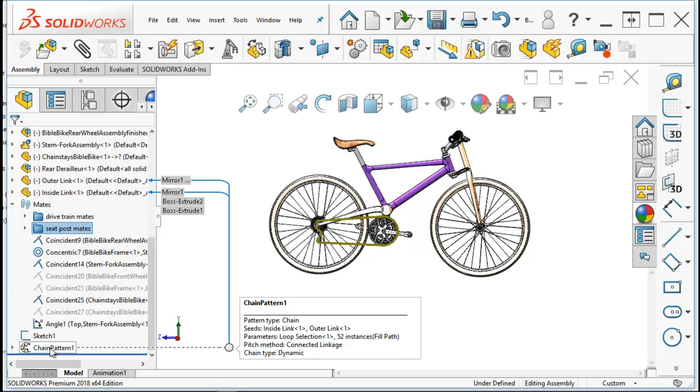Another thing that you can do that you might not even think of is to use patterns in some cases, rather than making a lot of parts and mating them into your assembly. So for the chain in this assembly, we only really put in a single link, then use the chain pattern to create the rest of the links. Now this does create the rest of the parts. You're not going to avoid that, obviously, but what it does avoid is making a lot of mates.

And solving a lot of mates is one of the things that slows down assemblies, especially as they get larger. If you are able to take this pattern and put it into one of the sub-assemblies, that would be another thing that you could do to help improve the performance of your top-level assembly.

Well, let's take a look at a couple other things. When you open up one of these parts, you've got a lot of extra information in here, but you also have mates that are specifically related to that particular part. So that's one of the ways that you can browse to information that you need very quickly.

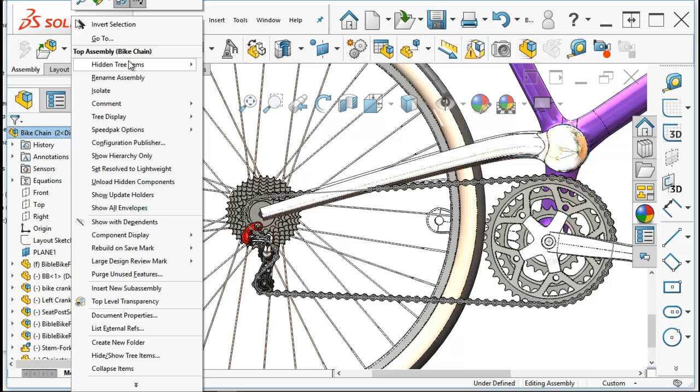Let's go to the top level, right click on the assembly name here, and take a look at some things. Generally in your assembly, if you don't need all of these things, like you don't need the configuration names, you don't need the display state, and maybe you don't even need to see the features for each particular part. What you want to see is the mates and dependencies while you're in the assembly.

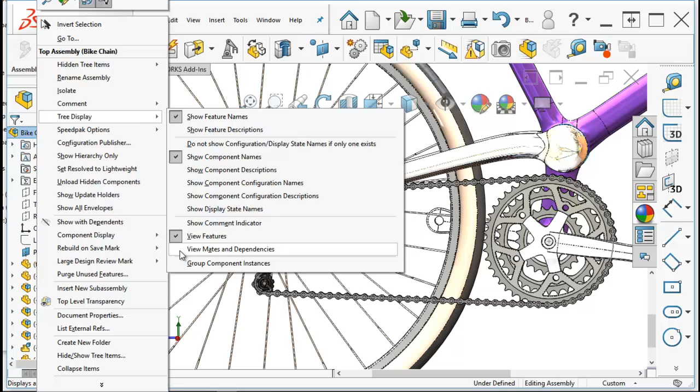So if I make that switch here and then come down and look at the part, all I'm seeing here is the mates. I can also see the features if I want to, but they're in a collapsed folder. This technique just makes it easier to look at various mates in various parts. Don't forget the feature manager filter. So if you're looking for a particular mate, if you're looking for a coincident in particular, you can filter that out and it's going to show you everything that you put in your list.

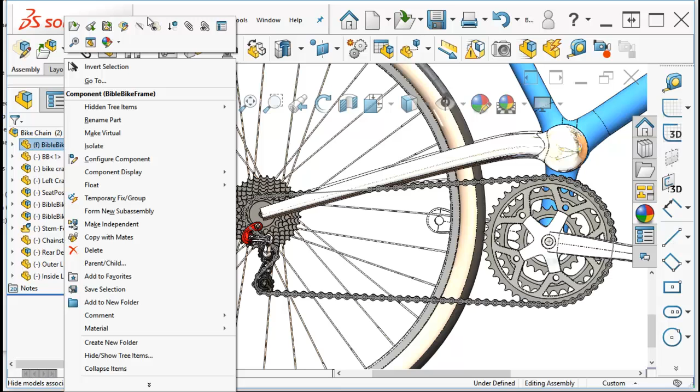Also, have a look at this functionality. If you right click on a component, you can go and view the mates just for that component. Well, we've already been able to do that by expanding the list, so that's easy. But here's another one. Notice with the cursor over the part, your dynamic reference visualization shows you the mates that are involved with that. Dynamic reference visualization, again, is accessed through the view menu, user interface, and dynamic reference visualization for child and for parent.

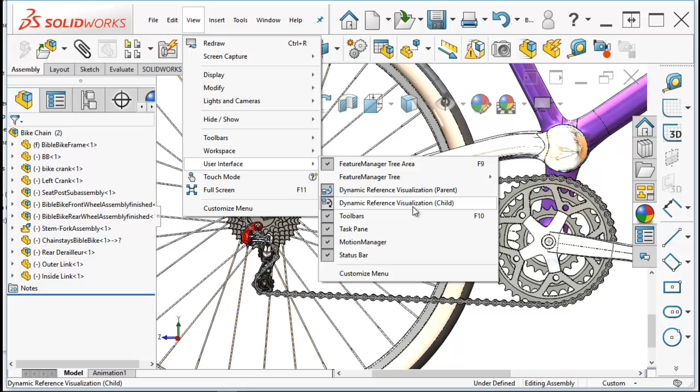Another way that you can use the view mates is by selecting multiple parts and view mates, and this will show you all of the parts and also isolate those components. It's a nice way to visualize some of the information.

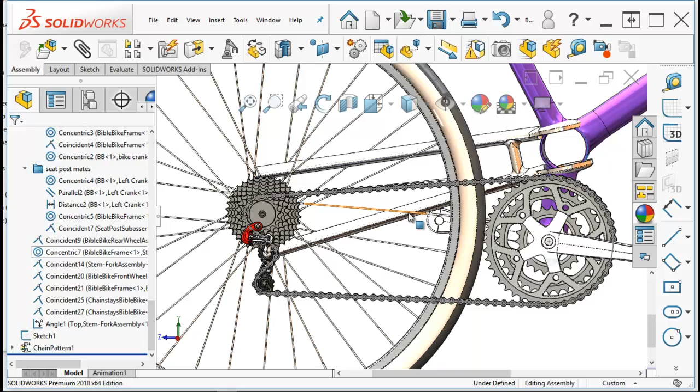And one of the great things with assemblies in general is that if you make a mistake that can't be undone, such as I've flipped this part around, one of the things that you can do is you can go to File, Reload, say OK, and SolidWorks will reload your assembly the way it was originally, with your part back in position.

So these are just a few tools on how to deal with mates in SolidWorks. And if you're looking for more information, more detailed information in particular, I'm sure you'll find a lot in the course of reading the chapter.